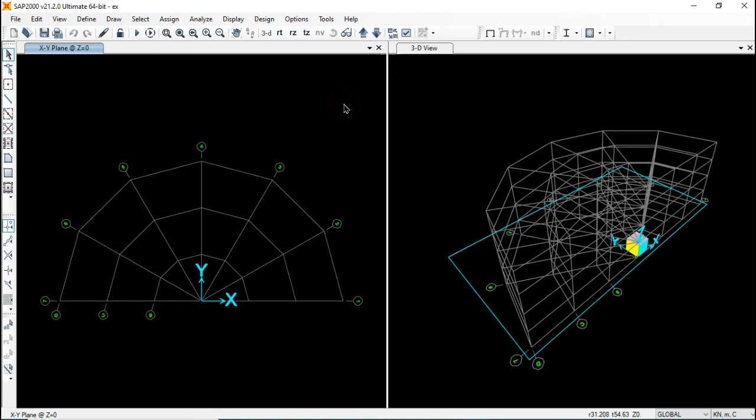So let's begin. Now I'm going to show you how to define section properties. First click on Define, then go to Section Properties. Then you can see the first three options are for line objects, this is for area objects, this is for solid objects. I already told you which type of object we can draw in SAP 2000.

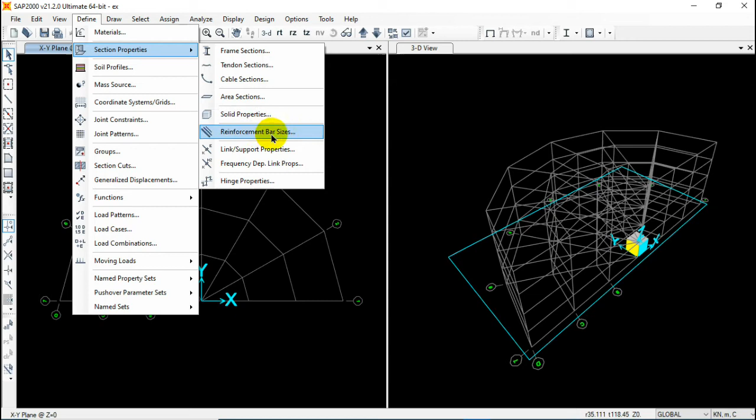This option is for reinforcement bar size, if you want to define different reinforcement bar diameters you can do that here. This section is for support properties, used when you want to add a damper in your structure. This is hinge properties, used for nonlinear analysis. These are all for advanced analysis, which I will cover in advanced analysis topics.

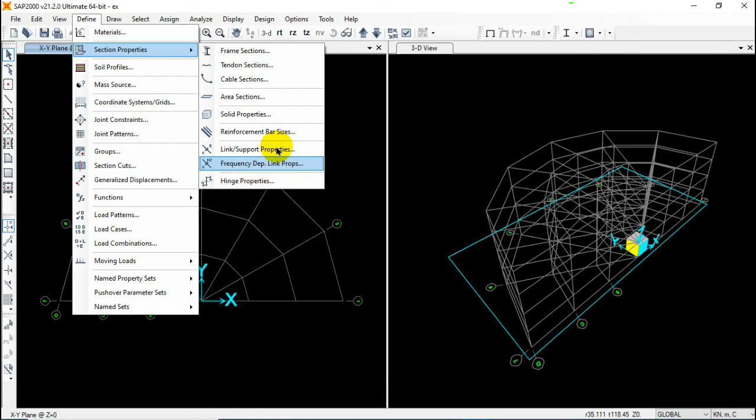Now first I am coming to the frame section. This option is used when you want to add frame section properties, say beam section or column section. Just click on it. Here you can see two options: import new property, and add new property. You can use either option to add section properties.

If you use import new property, the section properties will be imported from code and that time you cannot change any dimension or anything. But if you use add new property, you have to provide the section properties manually. If you click on import, the section properties are automatically imported from code.

Now I'm going to click on it, and here first you have to select which type of section you want: steel section, concrete section, or any other material section. Steel, concrete, aluminum and other options are also available. First I'm going for steel section.

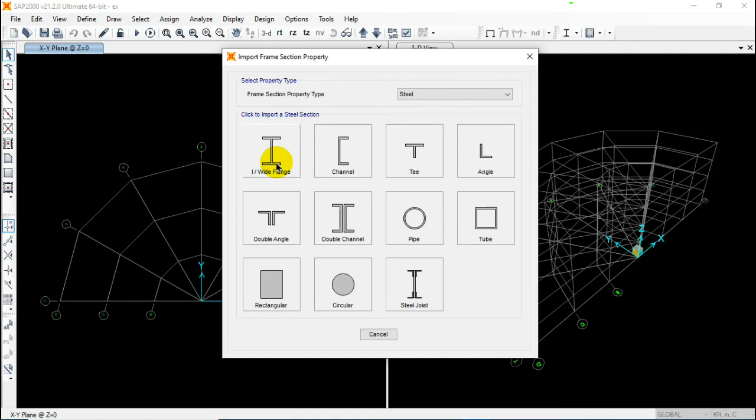Here you can see different types of steel sections available: I section, channel section, T section, L section, and also combined sections like double channel, double angle, etc. You can also use rectangular, circular, and hollow sections. As per your requirement you can select any type of section. First, say I am selecting I section, so just click on it.

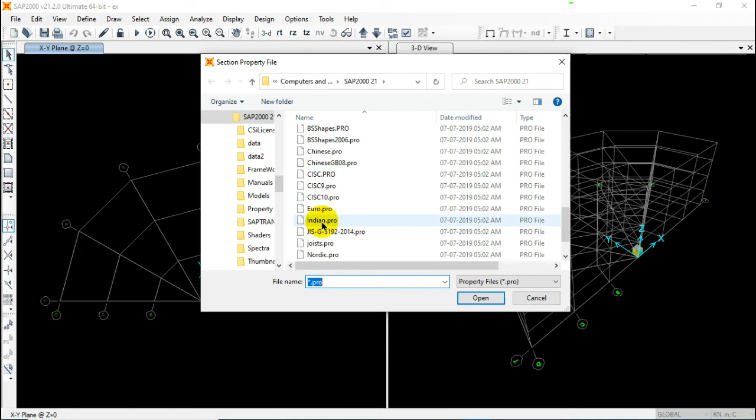Now in this window you have to select the code name. Suppose I want to select Indian code, so I'm going to select this file. Suppose you want to use Euro code, then you have to select that option instead. Now I am going to select Indian code, click on open.

Now here all available sections in Indian code are given, it's the I section list. You can choose multiple sections here, or select only one. If you want to select multiple sections, press shift and click on the sections, or you can left click and drag to select them.

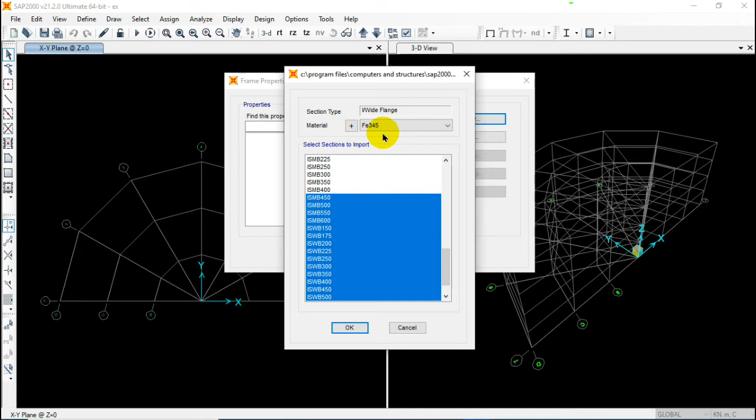Here you can see you can change the material. By default Fe345 is added. If you want to add a different material you can do that by clicking on this plus symbol, and this procedure I told you in the last video, so I'm just skipping it here. After that you can click on OK.

Here you see all section properties are added automatically - the height, width, thickness are imported automatically as per code, and you cannot change them. The material property you can change, but you cannot change the dimensions.

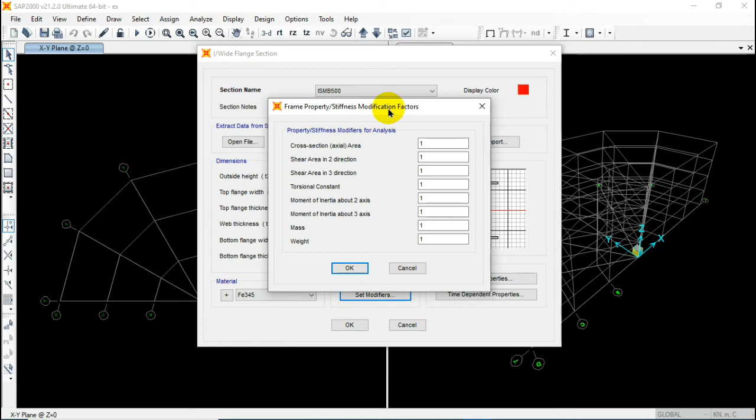And this is property modifier. This is used when you want to modify the stiffness. By default this factor is 1,1,1. This portion is basically used in advanced analysis.

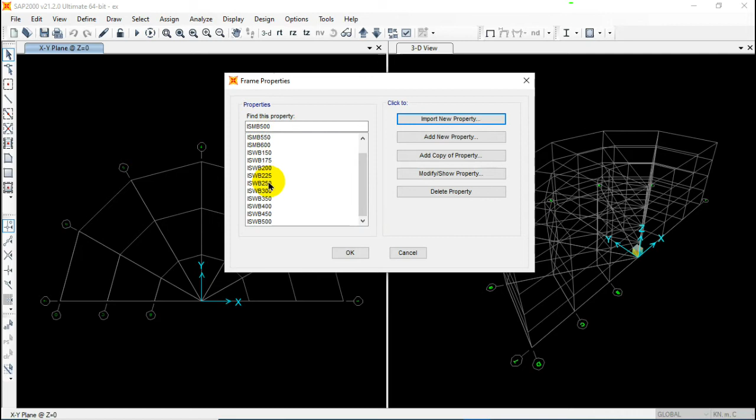Here one more option is available, which is section property. You can see what the section properties of this section are. Now click on OK. So you can see the list of members which I have added here, all members you can see. This is how you can import a property from code.

Now the second option is here, add new property. You can click on this add new property. If you click on it, here you can add all types of sections. Here all sections are available - steel, and concrete section is also available.

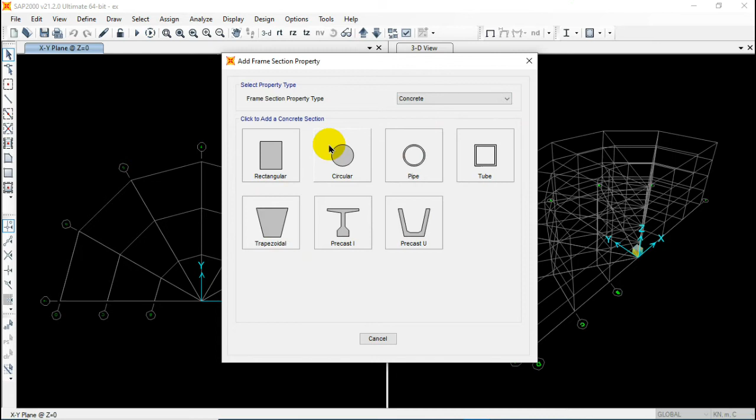If you want to use a rectangular concrete beam or column, you have to select this option, and you have to provide the size of the beam manually. By default whatever value you want - suppose I want 0.5 meter depth and 0.5 is the width of the beam.

Here you can see M30 concrete is selected. If you want to add different material, you can do that by clicking on this plus symbol.

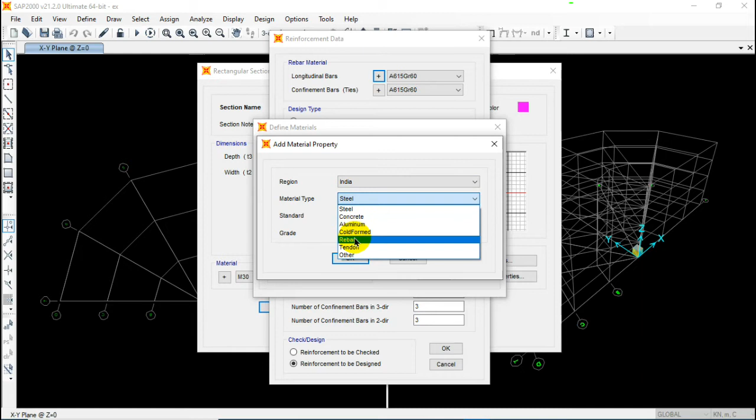Then here you click on concrete reinforcement section. Here you can see the rebar material. First of all you have to define the rebar material - by default this material is there. If you want to add a different rebar material, just click on this plus symbol, then click on add new material, and just select the country name, select the material type - here it will be rebar - then select the grade of the steel bar and select OK.

So now I have added HYSD 415. Now you can select it from here.

Here design type - this concrete reinforcement section will be used as a beam or column, you have to select that. For column it will be designed as PM2 M3 design, I will explain this later. The second option is beam only, M3 design only. So if I want this section as a beam, then I will click on this.

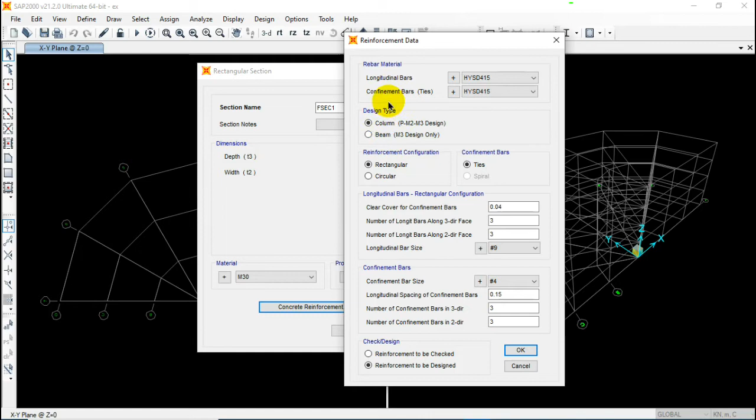Here you can see you have to provide the cover, by default it is 40 mm, so you can change it, say 0.025. Just make it 0.025. This is for ductile design. If you want to add more reinforcement for ductility, you can add them here.

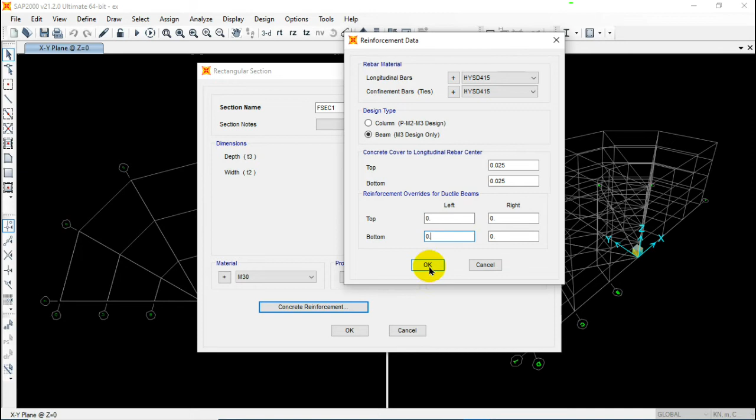Just click on OK. So here you can see there is no reinforcement, so it will act as a beam. You can name this section as beam - I am naming it as beam.

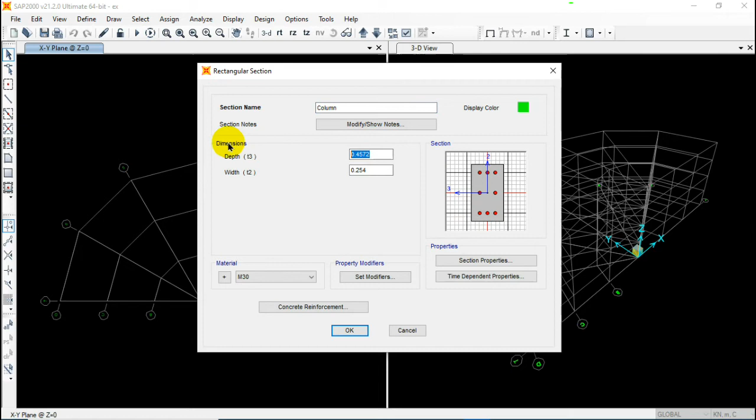Now I am going to show you how you can add the column member. Just click on it and name it as column, and give the dimensions - say it is 0.25, and this material, probably say it is M30.

So just click on this concrete reinforcement. Here it will be designed as a column. Here you have to select the rebar material. Here you have to provide the number of bars along the 3 axis and 2 axis.

Suppose I want to provide 4 bars in the column section. So along the 3 direction the number of bars will be 2, along the 2 direction the number of bars will be 2. So it will be 2 and 2. And here you have to provide the clear cover - clear cover here is 40 mm, so it is okay.

Now you have to select the longitudinal bar size. Suppose I want to add a 16 mm diameter bar, so 16D means 16 mm diameter bar.

If the bar diameter is not available here, you can add it by clicking on this plus symbol. See here the bar diameter and bar area is given. If you have a doubt that 16D means 16 mm diameter bar or not, you can check it here - see here it is 16D, and the bar diameter given is 0.016, so it means 16 mm diameter bar.

And how can you understand the unit? What is the unit? Actually this will be the unit - the unit here is meter, because by default the unit selected here is kilonewton meter centigrade, so that's why it will be in meter unit. So obviously 0.016 meter means 16 millimeter bar. Or if the bar diameter is not available here, you can add it by clicking on this.

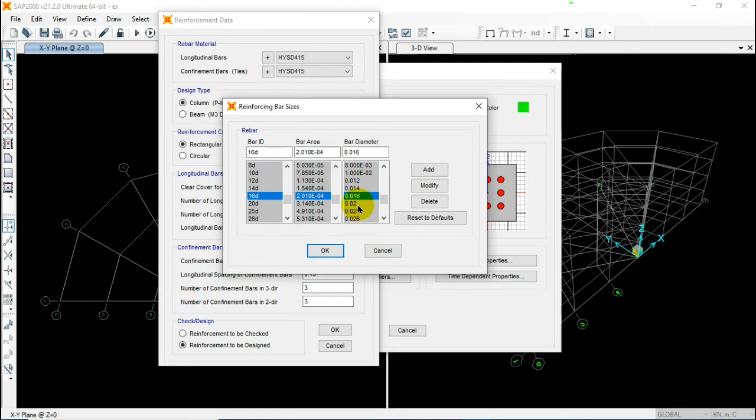So this is how you can add different diameter bar. Suppose I want to add here 16 mm diameter bar. In this section you have to provide confinement bar details. Confinement bars mean lateral ties.

Here I am assuming bar diameter is 8 mm, so that's why I have selected 8D, and preliminarily I am assuming that the spacing between confinement bars is 150 mm. Here you have to provide the number of bars in the 3 direction and 2 direction.

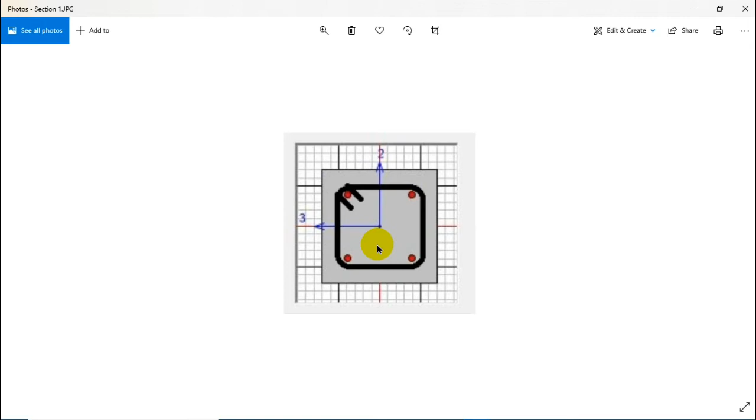Since we have provided total number of bar as 4, we have to provide lateral ties like that. From this figure we can see in the 3 direction the number of confinement bars is 2, and in the 2 direction the number of confinement bars is 2. So the number of confinement bars in the 3 direction will be 2, and the number of confinement bars in the 2 direction will also be 2.

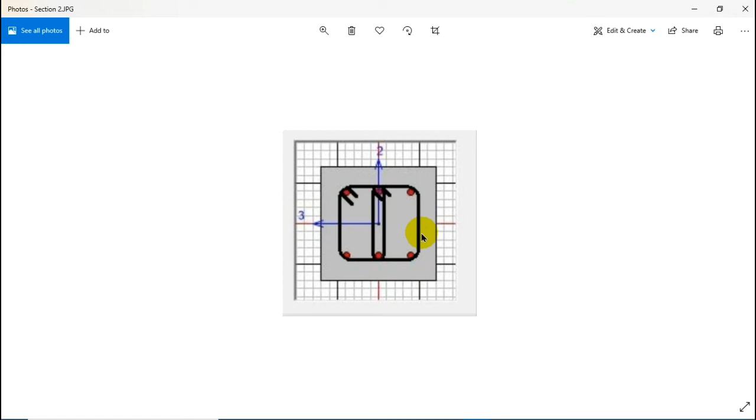If we had provided number of bars as 6, then in the 3 direction number of bars would be 3, and in the 2 direction number of bars would be 2, and the lateral ties would be like that. That time the number of confinement bars in the 3 direction would be 4, and in the 2 direction it would be 2. So we would write in the 3 direction number of bar is 4, and in the 2 direction number of bar is 2.

In this section you have to choose whether you want to design or just check whatever reinforcement details you have provided. If you choose the option 'reinforcement to be checked', the program will just verify whether this section is safe or not with the reinforcement you provided. But if you select 'reinforcement to be designed', the program will simply design that section and will not verify whatever reinforcement data you have provided. So this is the main difference between these two points.

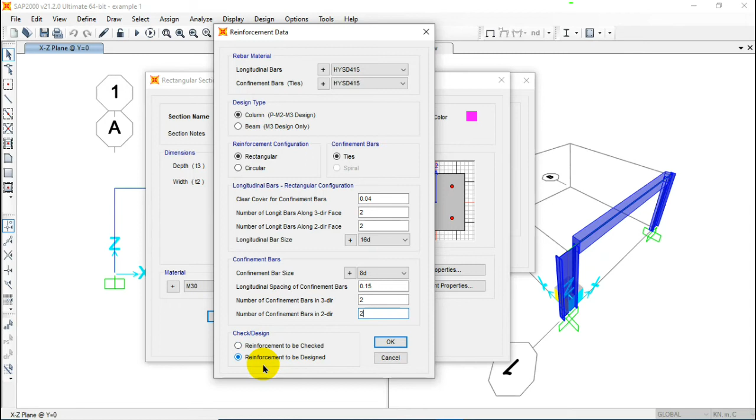Okay, then click on OK. So this is how you can add any kind of frame element section properties.

Next I am going to show you how you can add the tendon section. Click on define, then go to section properties, then select tendon section. Tendon section is used to model pre-stress concrete members.

If you want to add a new section, click on this add new section button, or if you want to modify the existing section, click on this button, or if you want to copy the existing section, click on this. I am going to add a new section, so click on it.

Here give the name of this section. You can model the tendon object in two ways: either as a load or as an element. When you know the losses in a pre-stress member, you will use this option, meaning you will model the tendon as loads. But if you don't know the pre-stress loss in the element, you will use this option, meaning you will model it as an element.

If you want to know in details, you can refer to the SAP 2000 analysis reference manual on page number 311. Everything is written in detail there, so you can read it.

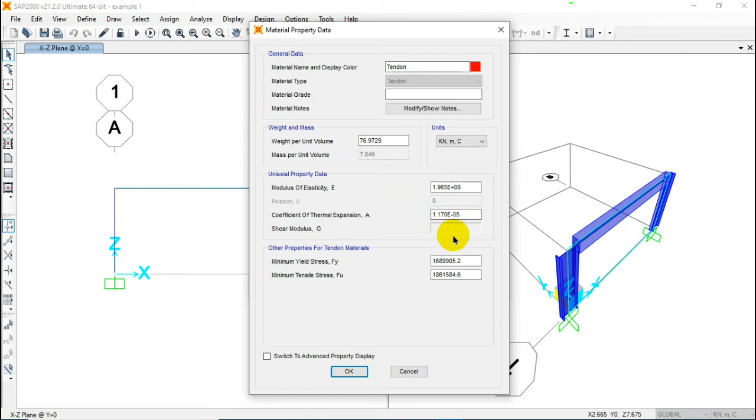Here you have to provide the tendon material property. If the material property is already added, you can select it from here, or if it is not added, click on this plus symbol and click on add new material, then select the country. Suppose I select India. Here the material type will be tendon, click on OK. Then name the material type, and here provide the weight, mass, everything, then click OK. Now you can see the tendon material property is added, click OK, then select it from the list.

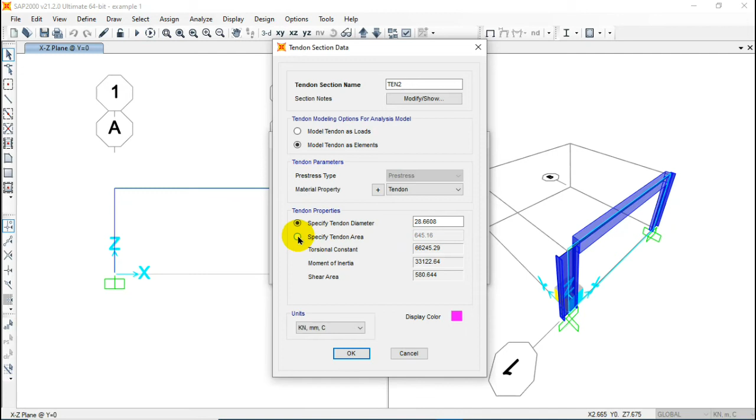Here you have to provide the diameter or area of the tendon. If you want to give the diameter, click on it and write the diameter. If you want to write the diameter in millimeters, select the unit as Newton millimeter or kilonewton millimeter, whatever unit you want. Or if you want to write the area, click on this and give the area. So this is how you can add the tendon section properties.

Next I am going to show you how you can add cable section properties.

Generally, we use cable element in cable stay structures such as in bridge. So if you want to add a new cable section, click on this add new section button.

Here name the cable section. Here you have to provide the cable material. If the material is already in this list, you can select it, or if it is not in this list, click on this plus symbol. If you want to add new cable material properties, click on this add new material, and here you have to select other, then click on OK.

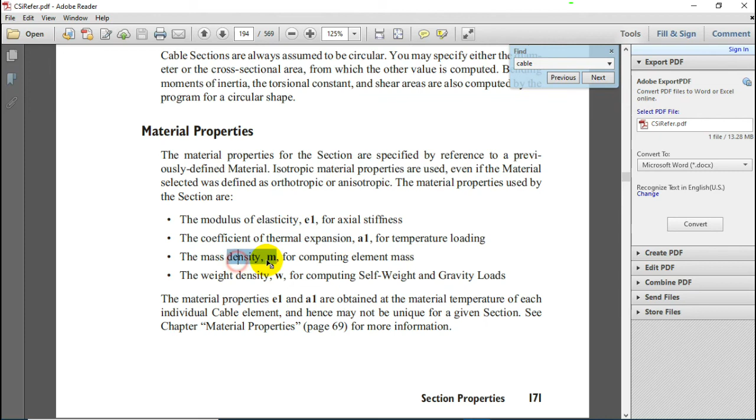Then give the required material properties. Cable element basically uses these material properties: modulus of elasticity, coefficient of thermal expansion, mass density, and weight. So provide this data, and then click on OK.

Here you can provide the cable diameter or area, and here you can select the unit, then click on OK. So this is how you can add the cable section.

Now I am going to show you how you can add area section in SAP 2000 software. To add area section, you have to click on define, then click section properties, then go to area sections. Later I will make a video on area section where I will describe in detail which type of area section we can add in SAP 2000 and the uses of those area sections.

Here you can see these three types of area element we can add in SAP 2000: shell, plane, and solid. First I'm going to show you which kind of shell element we can add in SAP 2000. Select shell from this drop down menu.

Shell element is used to model membrane, plate, and shell behavior in planar and three-dimensional structures. Now if you want to add a new area element, click on this add new section, or if you want to modify the existing area section, select the section here, then click on modify/show section.

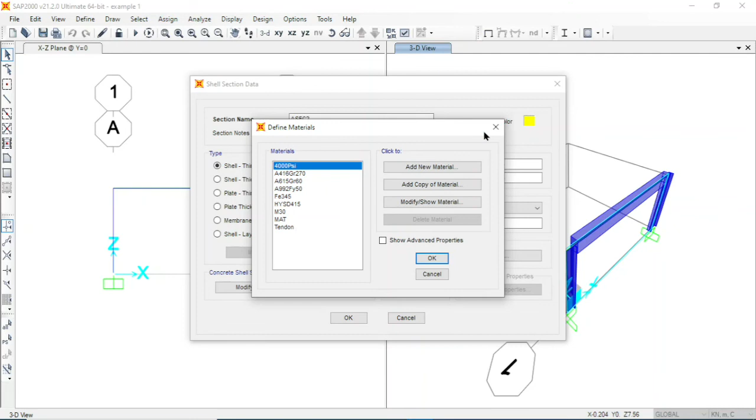If you want to design the shell element, you have to provide the design parameters here. Here you have to select the rebar material. I am going to select HYSD 415, and here you have to select the rebar layout. If you want to provide the rebar in one layer, then select one, or if you want two layers, then select two. So it totally depends on you. And here you have to provide the cover of rebar, calculated from center of the steel, so basically it is effective cover. Then click on OK.

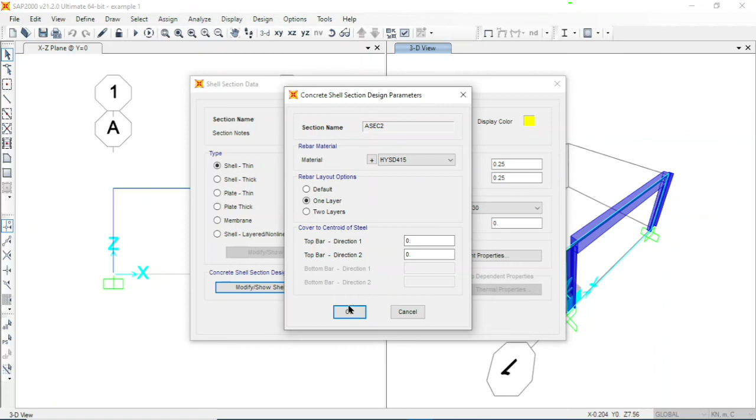And then click OK. So this is how you can add a shell element in SAP 2000.

Now I am going to show you how you can add a plane element. To add a plane element, select plane from here and then click on add new section. Plane element is used to model plane stress and plane strain behavior in 2D solids. Here you have to give the name of the section, select the type, whether you want it as plane stress or plane strain. Then select the material. Say I am selecting M30 grade concrete, and here you have to provide the thickness, then click on OK. So this is how you can add a plane element in SAP 2000.

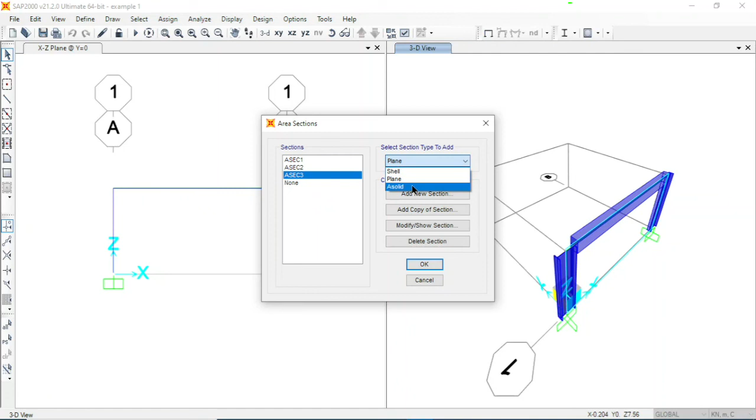Now I am going to show you how you can add an asolid area section. To add an asolid area section, click here, select Asolid, then click on add new section. An asolid element is used to model axisymmetric solids under axisymmetric loading. Here you have to provide the name of the section and select the type. If you click on this checkbox, the software will use 4 incompatible bending modes to calculate its stiffness. This is very important where bending moment is important. Where bending moment is not important, you can suppress this mode - for example, typical geotechnical problems where bending is not important, you can uncheck this box.

And here you have to select the material. Say I am selecting M30 grade of concrete, and here you have to provide the thickness - here the thickness you have to provide in terms of degree, and then click on OK.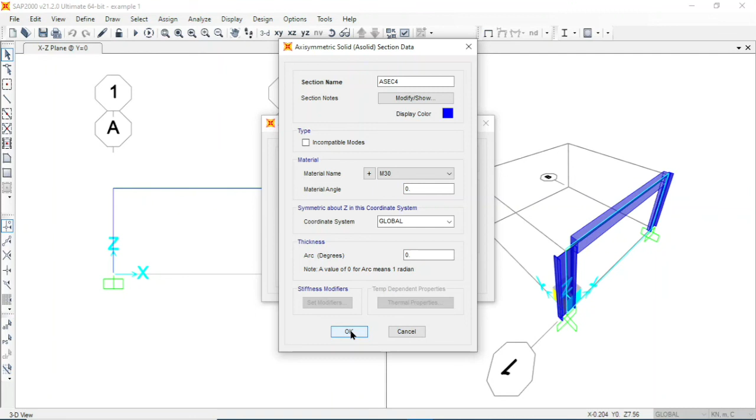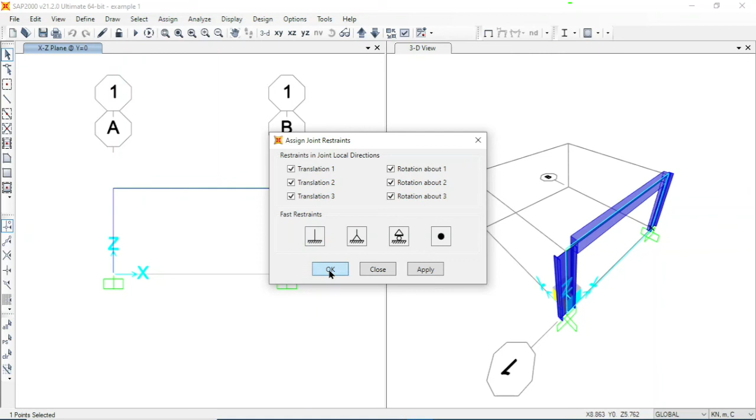Now I am coming to the next topic, which is joint restraint and joint constraint. To add joint restraint, first you have to select the joint. Say I want to add a joint restraint here, so first I am selecting it. Now you have to click on assign, then go to joint, and select restraint. Here you have to select which type of restraint you want - this is for fixed, this is for hinge, this is for roller. Whichever type of joint restraint you want, select it from here, and click on OK. And now the restraint has been assigned on this joint.

Now if you want to assign a joint constraint, you have to click on assign, then joint, then constraint. First you have to define the joint constraint, which type you want. To define it, click here, and select the type of constraint you want - it can be body type, diaphragm, plate, or beam. There are different types of constraints. I will make a video on this topic later, where I will describe details about different types of constraints.

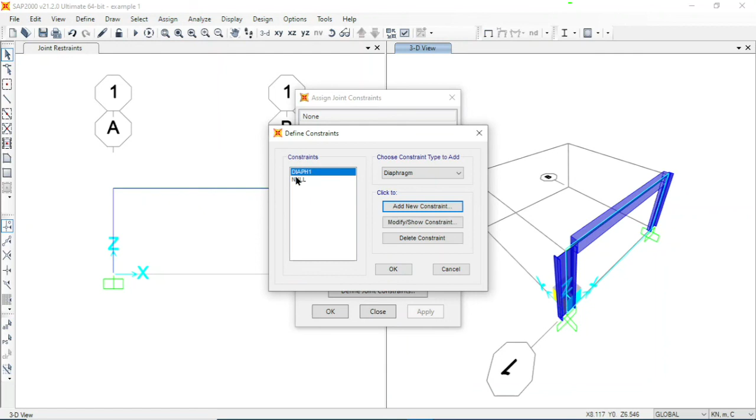So say I am adding a diaphragm constraint, so that time you select this and click on add new constraint, then select the constraint axis and click on OK. Now this constraint is added here, then click on OK, and now you have to select it from here, then click on OK. So to assign a constraint too, first you have to select the joints, then you can assign something. I will cover this topic in detail later.

In the next video I am going to show you how you can draw the model here by using this section.